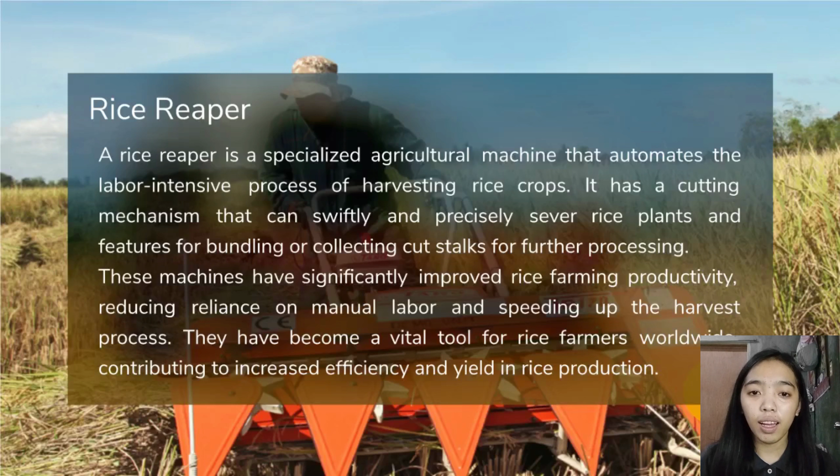Rice reaper specifications.

Engine: 3.5 horsepower, minimum of 4-stroke gasoline. Cutting height is adjustable, and the cutting width is 1.2 meters. The field efficiency is a minimum of 65%. The components are the cage wheel and the pneumatic tires. The labor requirement is only 1 person. It has features that make harvesting easier and faster than manual harvesting, less dependent on field size, and less shattering loss during harvesting.

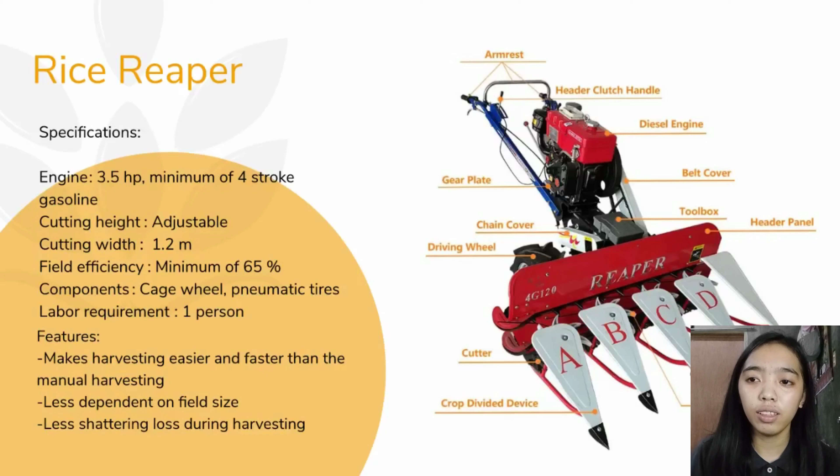Parts and functions of a rice reaper. Star wheel: the star wheel is often positioned in front of the cutting mechanism, sickle blades or cutting bar.

As the reaper moves through the rice field, the star wheel rotates and collects the cut rice stalks, pulling them towards the conveyor or gathering system.

The next one is the sickle blades or cutting bar. These are sharp, curved blades designed to cut through the rice stalks as the reaper moves through the field.

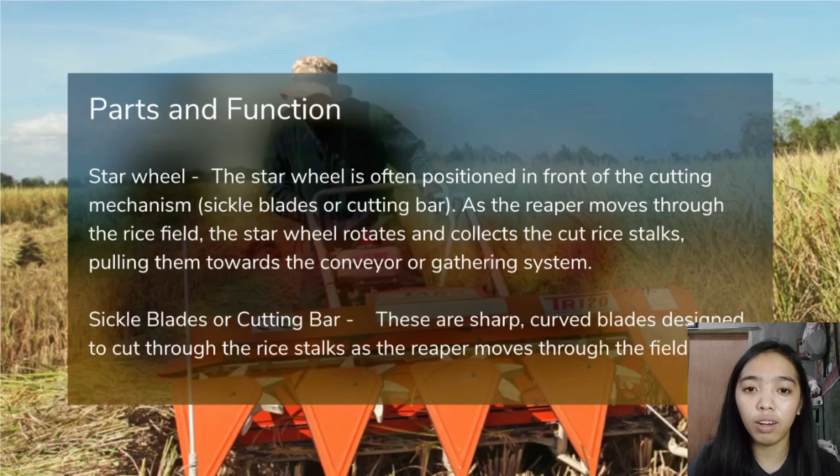The next one is the crop divider. This is located at the front of the rice reaper, just ahead of the cutting mechanism, which could be a sickle bar or cutting blade. Its primary function is to gently separate the standing rice crop as the reaper moves through the field. By doing this, it ensures that the crop is evenly distributed across the cutting width of the machine.

The next one is the belt conveyor. Once the rice stalks are cut, they need to be conveyed to the collection or bundling area. An auger or conveyor belt assists in moving the cut stalks to the collection point.

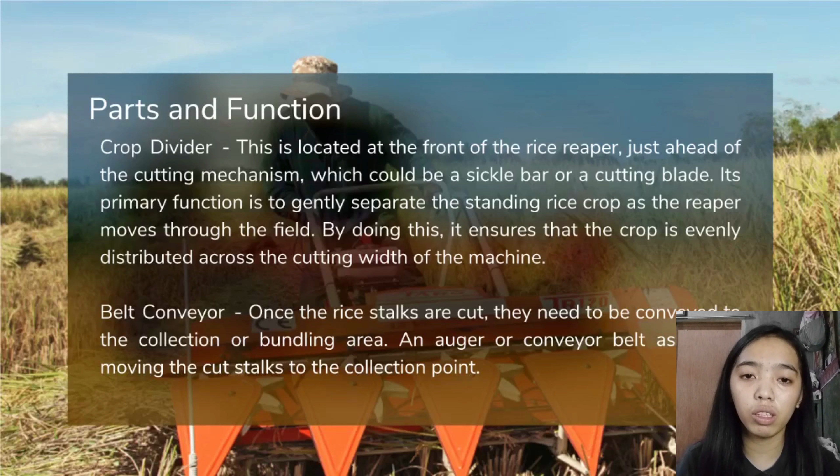Header pointer: the function of the header pointer in a rice reaper is to adjust the cutting height of the cutting mechanism to match the specific conditions and growth stage of the rice crop, optimizing harvesting efficiency and preventing crop damage.

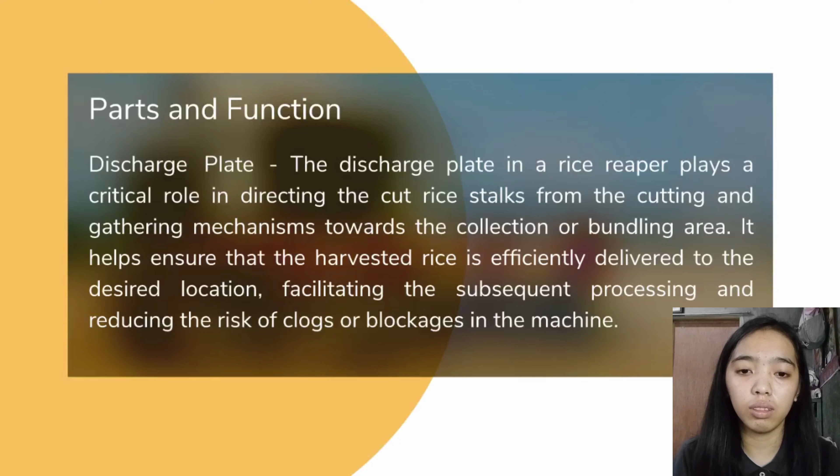Gathering header: The gathering header in a rice reaper is responsible for efficiently collecting and aligning the cut rice stalks into a neat swath or windrow, making it easier for subsequent processing and bundling of the crop. By guiding the rice stalks into a uniform arrangement, the gathering header improves the overall efficiency of the reaper, reducing crop losses and ensuring a smoother workflow during rice harvesting.

Last one is the marker. It's a visual or physical indicator that helps the operator maintain a straight and consistent cutting path across the field, ensuring that the rice crop is harvested evenly and without overlaps or gaps.

Ang marker naman ay yung makakatulong sa operator natin na ma-align yung sinusundan niyang path doon sa rice field natin, para ma-sure na yung na-harvest na rice ay walang nalalagpasan o walang naiiwang nakatanim.

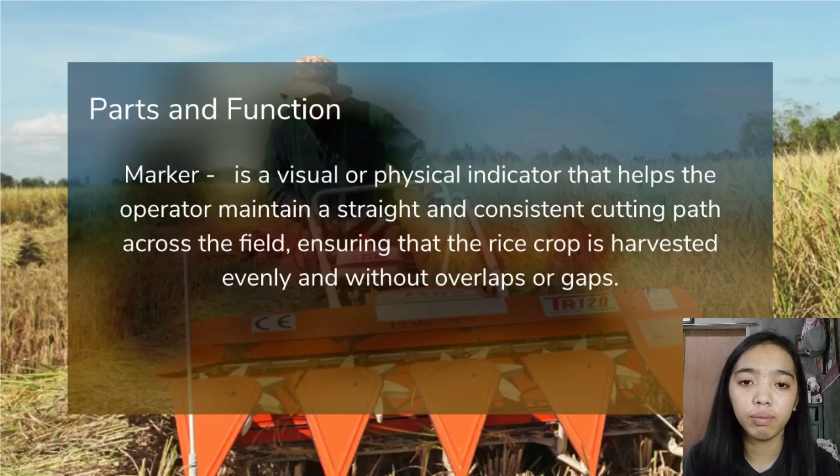Now, how does a rice reaper work? A rice reaper mechanically cuts and lays crop in a windrow which allows easy pickup of the harvested crops. It is recommended for small to medium size farms. This machine makes harvesting easier and faster, because instead of manual harvesting, it requires less labor and is less dependent on field size. Also, it results in less shattering loss during harvesting.

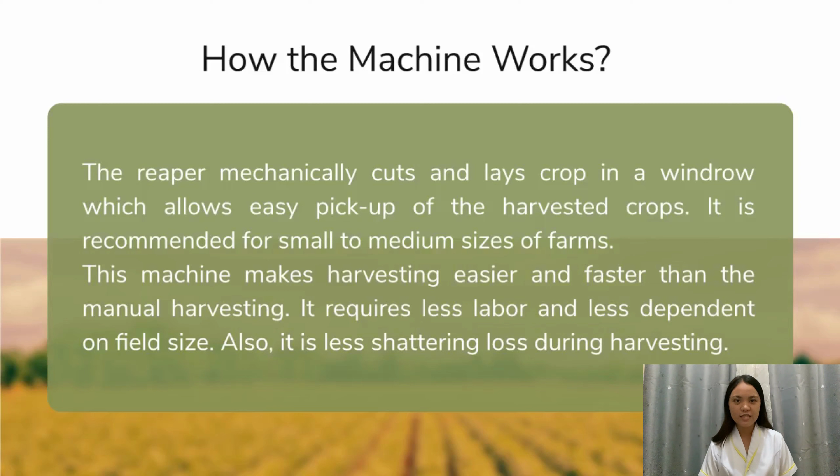How do we operate a rice reaper? First, the pre-operation inspection. Before we start, kailangan natin i-inspect yung machine kung meron bang sira o problema, meron bang kulang na parts, o marumi ba ito.

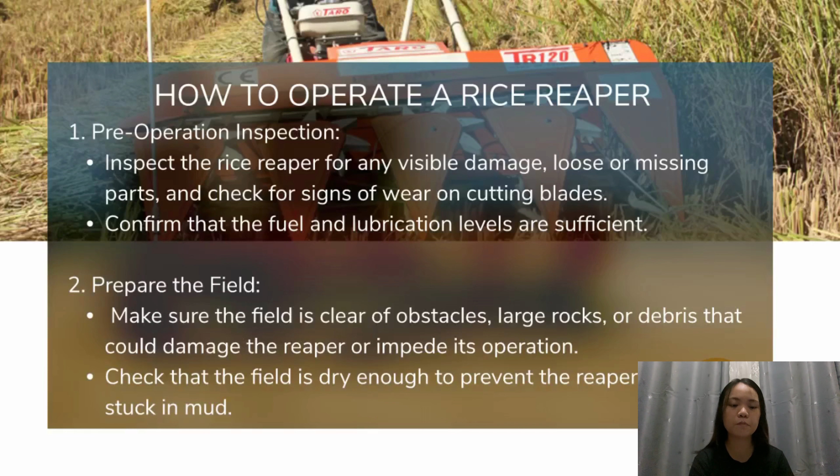Next, prepare the field. Make sure that the field is clear of obstacles like mga bato, o anumang debris na pwedeng makaapekto o makasira sa pag-andar ng machine. The next step is to start the engine.

After you make sure that there is no problem on the machine and on the field, you may start the engine according to the instruction from the manufacturer.

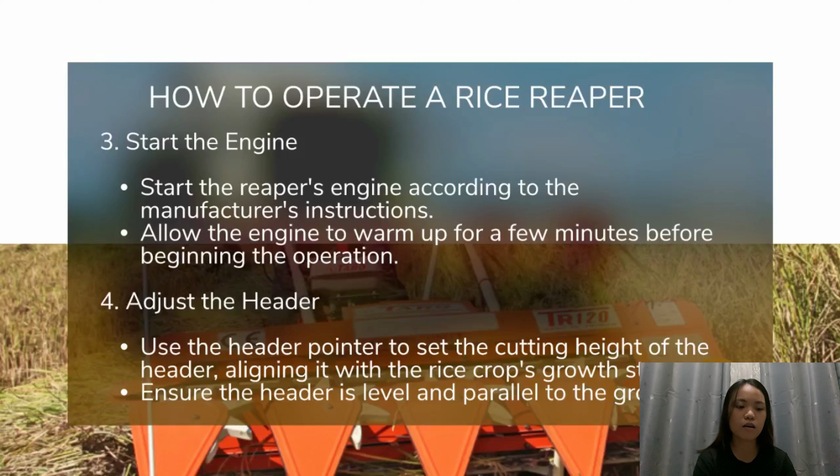Next is adjust the header. The header is used to set the cutting height of the machine, and then align it with the rice crop's growth stage. Next is to position the marker.

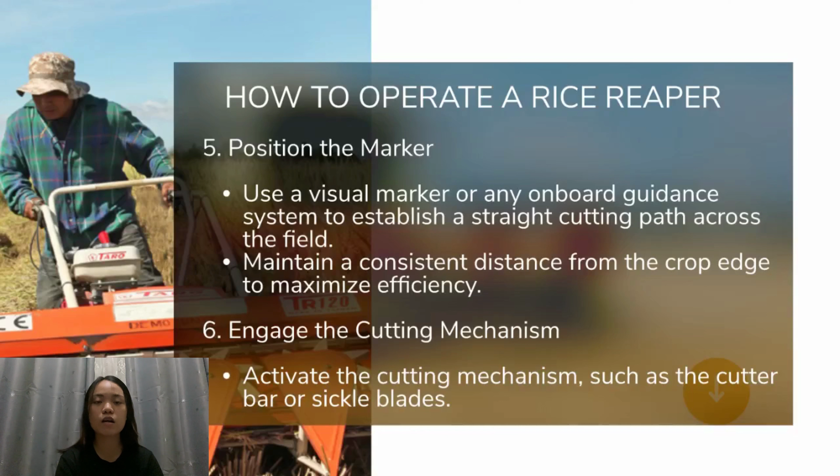Use a visual marker or any onboard guidance system to establish a straight cutting path across the field. Next is to engage the cutting mechanism, activating the cutter bar or sickle blades.

Now you may drive the reaper. Gradually drive it forward, following the marker or the guidance system to maintain the path that needs to be reaped.

Then monitor the operation. Watch the cutting mechanism to ensure it's cutting the rice crops cleanly and evenly. As you operate the machine, syempre, you also have to monitor or tignan kung paano siyang gumagana to ensure that the machine functions properly.

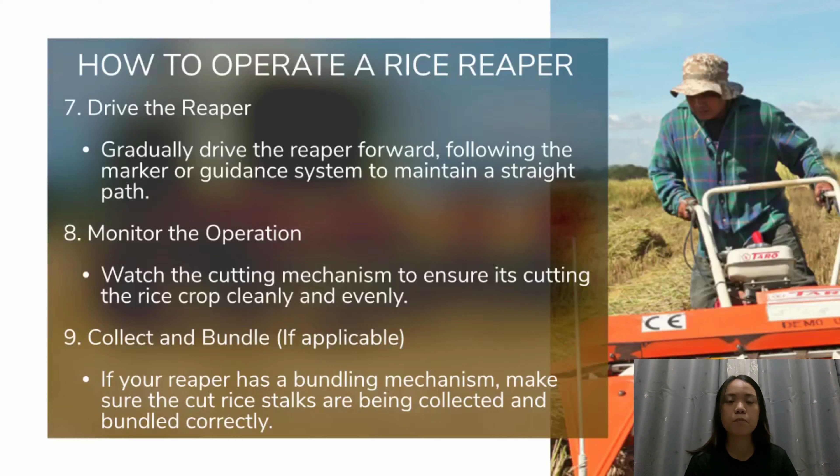And then you may collect and bundle. After the operation, after mong paandarin yung machine, pwede nang i-collect yung mga bundle ng rice na na-reap ng machine. After that, you may shut down the machine safely.

When finished with the field or at the end of the workday, disengage the cutting mechanism and stop the engine. Then you may clean the reaper and remove any debris, plants, or material na pwedeng sumama o umipit doon sa machine during operation.

Lastly, store the reaper in a secure location or storage. So, pagkatapos gamitin at malinis, pwede na nating ibalik yung machine sa taguan o sa storage kung saan siya ay safe at hindi masisira o kakalawangin yung mga parts.